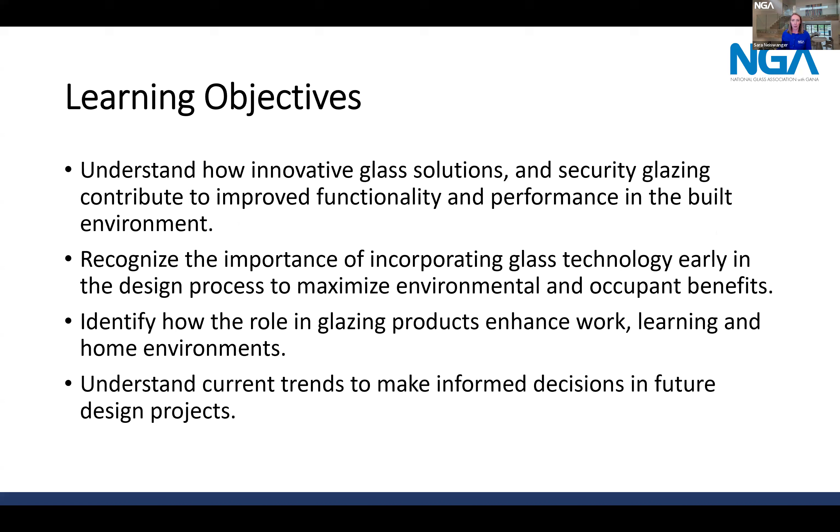So let's get a little background first on the National Glass Association and understand what this trade association does. We are the only association serving the entire glass and glazing industry supply chain, starting with the primary glass manufacturers through the fabricators, the glazing contractors and installers, and then finally suppliers, distributors, and other partners. We have over 1,800 member companies in these categories, and we also have an affiliate category for professions like architects, consultants, and educators. So we are hoping and intending to be your nonstop, one-stop shop for all things architectural glass related.

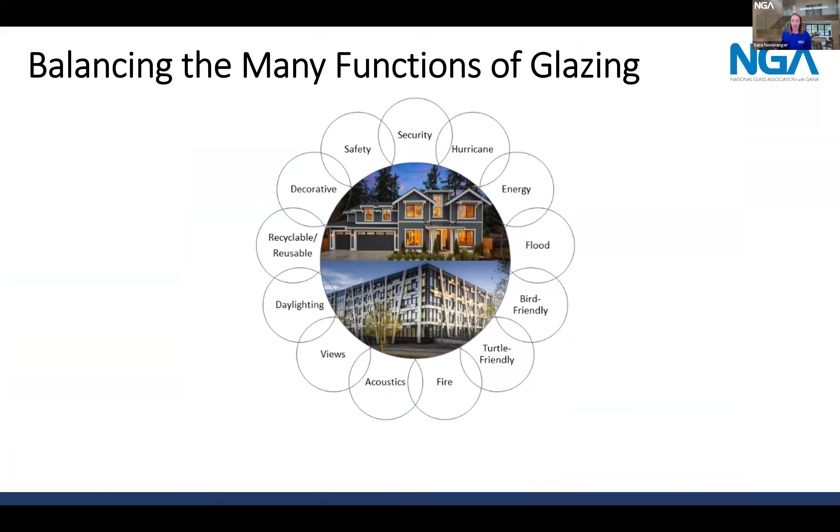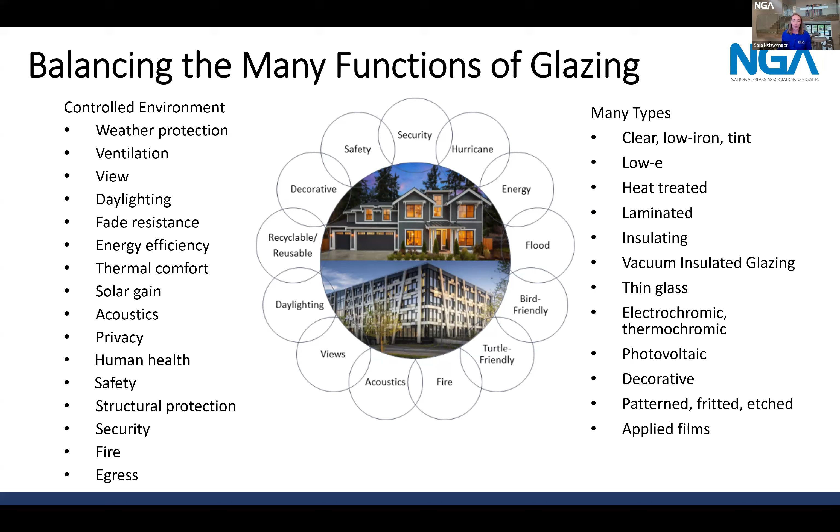So NGA advocates, promotes, and educates in all areas that influence glass and glazing. That means that in addition to promoting it, we're defending it and protecting glass when it comes to being selected as a building material.

If it impacts or influences glass, NGA is involved, and these are examples of some of the stakeholders we interact with on a regular basis: building codes, both at the hearings and by jurisdictions, standard setting, regulatory and certifying bodies, and other organizations in our building materials space. We coordinate often with groups like the Aluminum Extruders Council, the International Window Film Association, ANSI, and more. And then we do this coordination globally too.

Our teams are heavily involved in the international standards setting organizations. We've been to Glass Performance Days. We are also an AIA registered provider, and we engage with AIA often, and most recently NOMA as well. You can find us at ASTM, the National Fenestration Rating Council, and more. So we are trying to be involved to educate on glass and its use as broadly as possible.

Thanks, Sarah. So I'll be off camera, just cognizant of any bandwidth hiccups as we dig into some of these trends. That Venn diagram that Sarah showed, looking at all that glass can do, we'll return to that throughout this presentation while discussing 5 key North American market drivers and trends, the glass products coming out to meet those trends, and also how the glass industry is thinking about them in general.

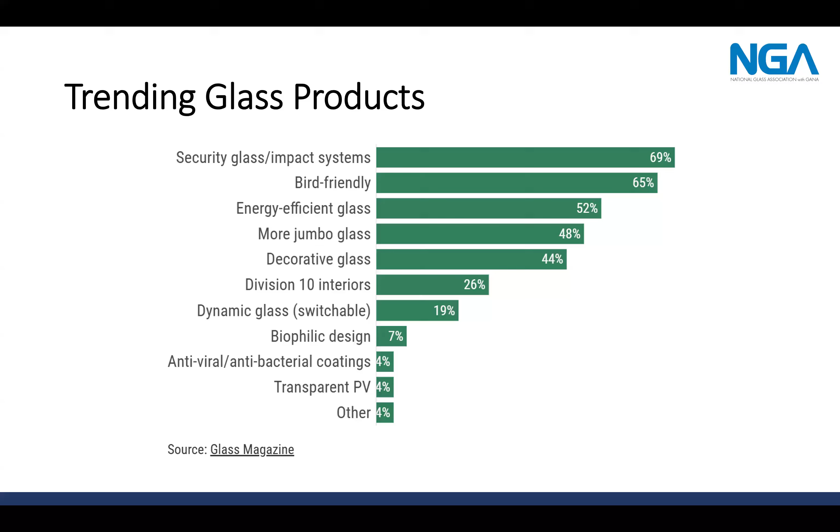Let's move on to our first trend, bringing back this Venn diagram. So protective glazing, where we're looking at it today, we pinpointed a few areas around this circle.

Within the notes of this presentation, we have put links to a number of NGA technical resources on each of these topics. Sarah may be posting this in the chat if we're able to. It's this section in particular. We have a huge wealth of technical resources on everything from blast-resistant glazing, detention facility glazing, school security glazing, plus some more general hurricane glazing and laminated glazing reference manuals. So if you want to really dig into the technical nature of what glass can do in all of these areas, please take a look at these resources. Many of them are free, you just have to log into the site.

Architectural glass is beautiful, versatile, and multifunctional, and it saves lives. Glass in this protective glazing category provides safe egress for occupants in the event of fire. It protects people and interiors in the face of hurricanes. It can keep intruders out, provide ballistic and blast protection, and it also keeps occupants safe in much more simple day-to-day ways. Glass floors have an anti-slip surface, and our railings and balustrades are all designed to make sure people are safe.

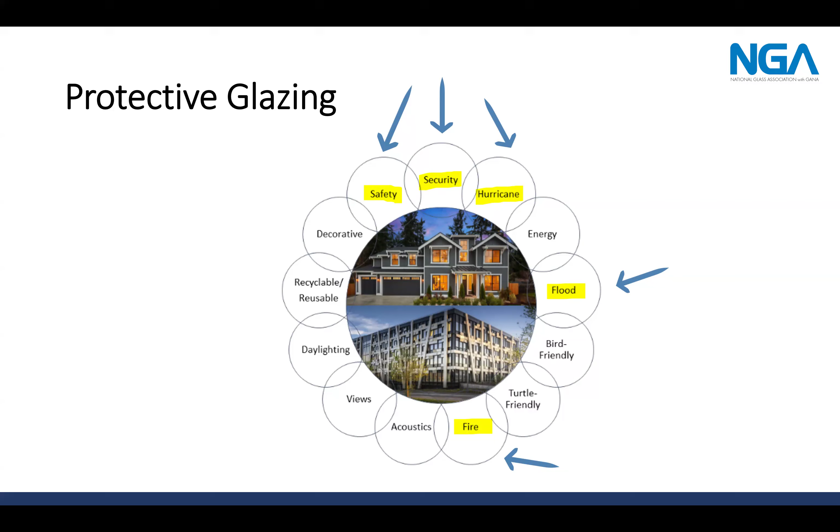For today, we'll just focus on 3 categories within protective glazing. The first is hurricane impact. On the next slide, we'll start to dig into this category.

I'm sure you are all very fluent in the hurricane codes, but just a brief history to remind us of how this became such a trend for the glass and glazing community. It really all comes out of Hurricane Andrew that hit Florida in '92, causing an estimated 25 billion dollars in damages. Just 2 years later, we started to see some hurricane mitigation provisions in the codes. Florida Building Code, first edition, came out in 2002. The most recent version was released in 2023.

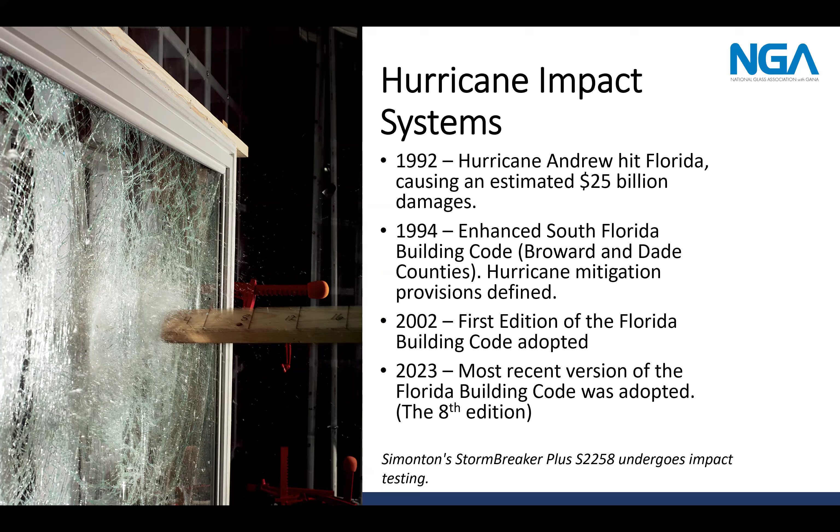Next slide. So what does this actually look like, though, in practice? Because we've had these hurricane codes for many years now, decades now, and the glass and glazing industry has responded by looking to do more.

Obviously, all of these products need to meet these very stringent impact test standards and water resistant requirements within them, but we also want them to look beautiful. We don't want to be bound by these requirements. It's really an opportunity to do more with these products. So that's what we start to see in architecture, as the glass and glazing community has begun to push the envelope of what we can do with these products while meeting the hurricane impact requirements.

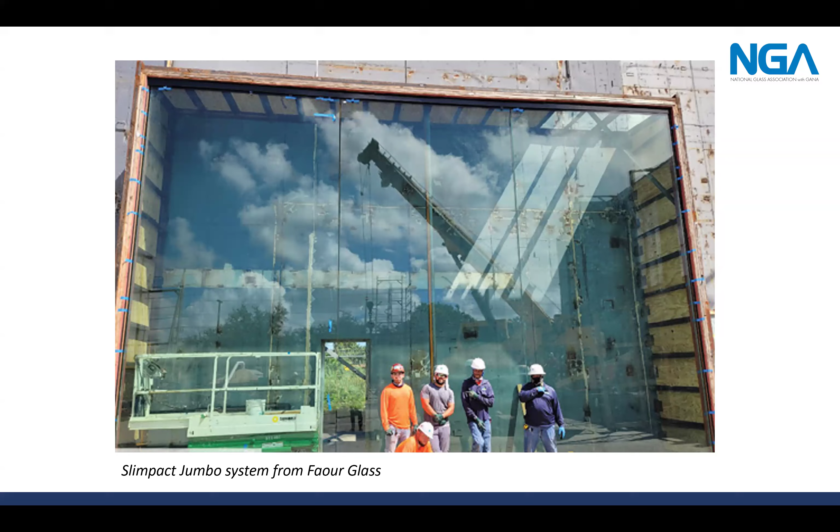Here is a related example. Flood barriers and flood zones are very relevant to hurricane-prone areas, but also to any low-lying flood areas near rivers and such. We're seeing, around the country, a need to consider flood barriers. What glass and glazing allows in these situations is to provide those views all throughout the year, and these systems are being tested to hold back the floodwaters when they come. For those who want to look at the test methods involved, it's pretty impressive, the hydrostatic load testing of these units, which are capable of holding back many feet of water in flood events.

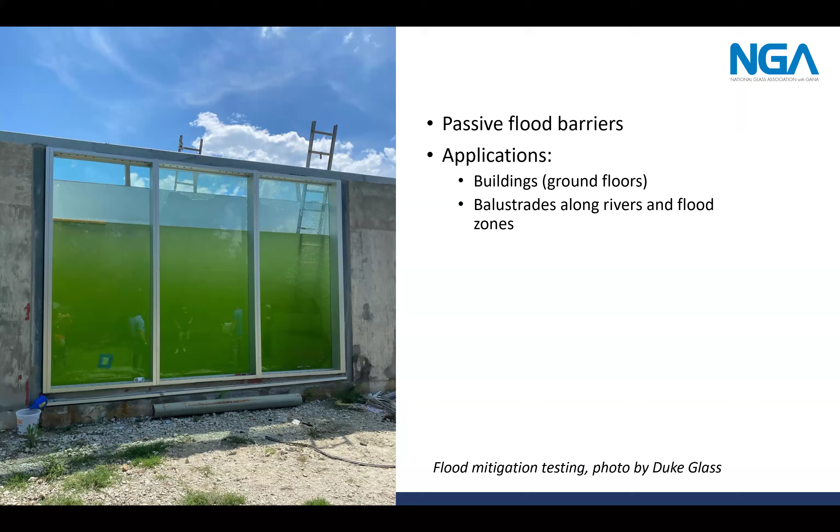Moving on to fire rated glazing, this is another example of protective glazing doing more on a project. Fire rated glazing is not new to building codes at all. I'm sure you're all very familiar with where you need these products in your hallways, along egress points in a facility.

But what we're seeing now with design trends is that folks really want that daylight to permeate further into the building. That means looking at spaces that may have previously been a solid wall with a small window, and wanting those to be all glass, or decorative glass. We're rethinking what we'd like these spaces to look like. How can we do more with them? Can they also be high performance? Do they also need to be security rated?

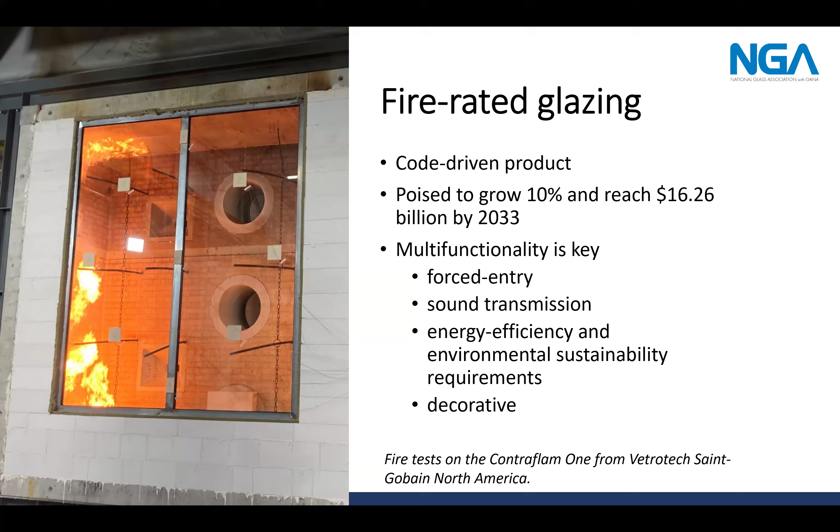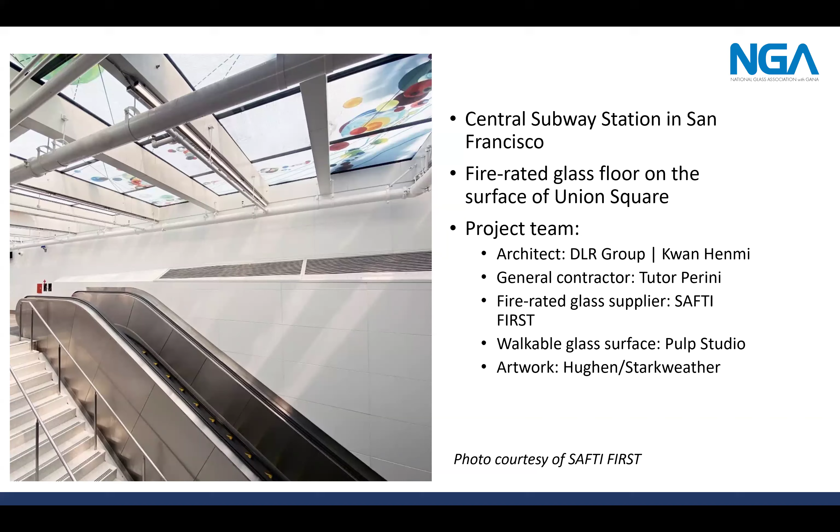Doing it with a decorative glass product adds even more to that, allowing for some aesthetic flexibility, bringing some beauty into it. One additional level of protective glazing: because it's a walking surface, it has to be a non-slip surface on the glass at top. So it's a fire-rated system that's also decorative and non-slip.

So we have heard that this has been an interesting area of growth for fire-rated glazing. Moving on to our final segment of this protective glazing is school security. So this has been one of NGA's key legislative priorities for several years, just with industry calls from the industry. We've come together in fly-ins in DC to support federal legislation and funding appropriation for school safety and security.

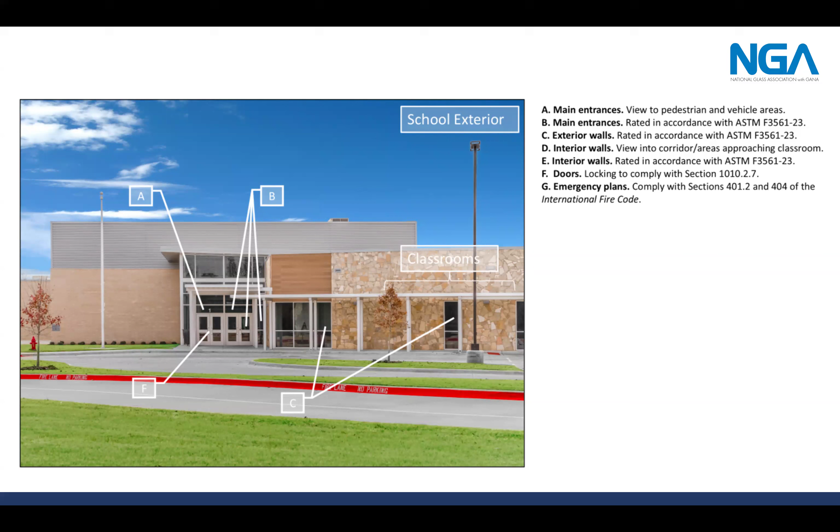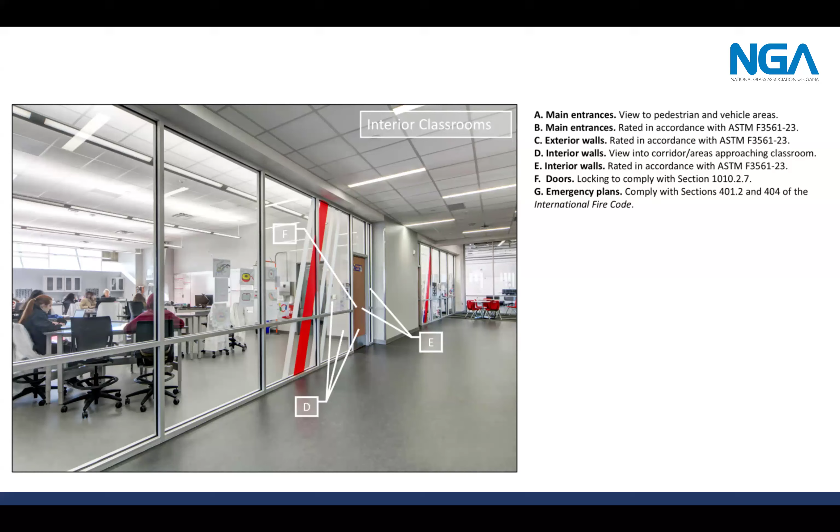And in the speaker notes here, we have really a wealth of resources about the test codes and what NGA and our members are doing to support some of these changes through fly-ins. And really, these are not bulletproof products. That's not what we're looking to do. We're looking to deter. In the average course of an active shooter situation, it takes about 3 minutes for responders to arrive. So how can we harden these exteriors enough to protect occupants with systems that readily exist? So with that, I'll close out the protective glazing section and let Sarah take over on our next theme.

Yes, thank you, Katie. So we're moving from protecting our occupants to now protecting habitats. In this section, we're specifically going to touch on bird and turtle-friendly glazing, both of particular importance across much of Florida as well. Bird-friendly glazing was the #2 trending product according to the Glass Magazine Top Glass Fabricators report Katie had on screen earlier. Its use has been primarily legislation-driven and supported by the ability to earn LEED credits, fulfill building sustainability desires, and its general versatility across project types.

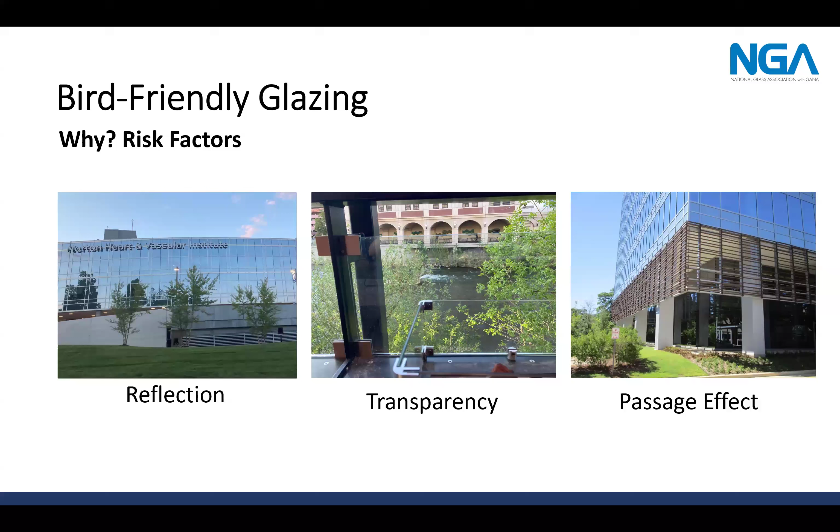And then the danger zones that we see in building, particularly with using glass. Plants, trees, bushes, and other types of vegetation, as well as water, can attract birds and lead to more collisions. Some studies using bird feeders demonstrated that collisions occur when birds take off from more than 3 feet away, after they've gained some momentum. And a majority of the documented collisions occur from the ground level up to about 100 feet. And this correlates with many of the natural habitat elements like a mature tree canopy that birds are already perched

in or flying from. The second picture, top middle, is an example of channeling. Channeling are landscape features that create a flight pathway along a corridor. So in this case, a sidewalk, for instance, is lined with trees and shrubs, but it creates a direct flight path channeling the birds toward the building. Glass corners, where glass lites meet at a 90-degree angle, very visibly create what looks like a fly-through condition when birds aren't able to perceive the barrier.

And then the lower photos, the levels adjacent to green roofs or rooftop gardens or terraces create a situation for birds. And then design features like alcoves or interior courtyards can actually end up being design traps for birds. It creates almost a mirror maze effect, and they have trouble finding their way out.

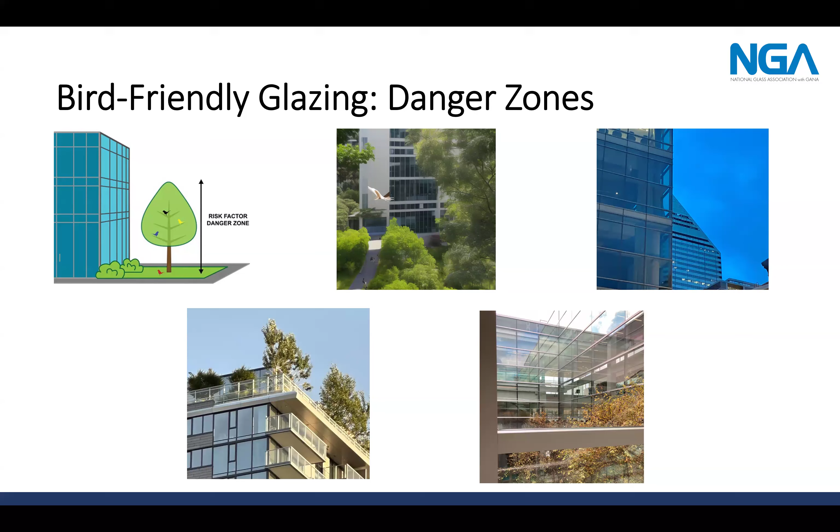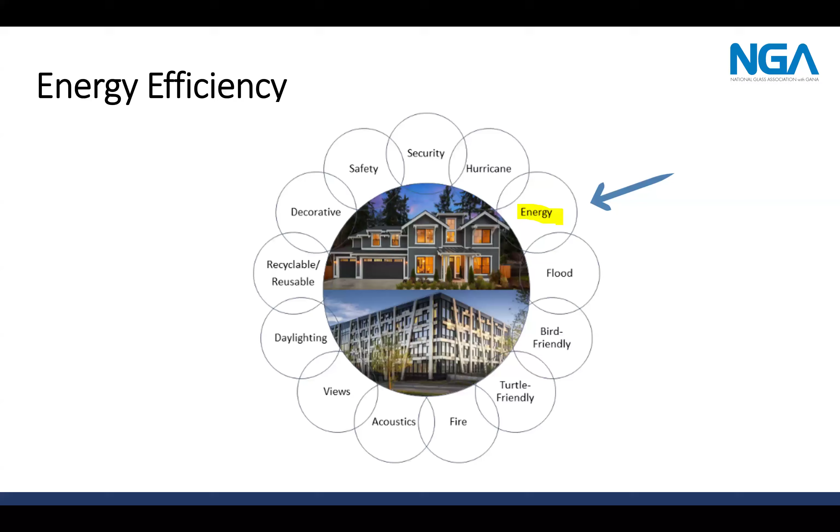We can go on to the next slide. The next couple of slides were provided by our energy code consultants who are really looking very closely at this on a day-to-day level. Our code consultant, Tom Culp, says that he's constantly receiving questions and inquiries about how the new administration might affect where energy codes are going.

And from his perspective, from what we've seen during Trump 1 and during previous administrations, from a high-level perspective, we expect to see that if the federal government steps out of pushing change in certain areas, often we start to see an increase in regional activity. So from an industry perspective, we're watching all of this.

What we have seen in the last several years are jurisdictions like New York City or the state of Massachusetts, California, these spaces that are introducing their own more locally based jurisdictional codes. And our industry is eyeing those as what we need to make sure that we can meet, and seeing how the rest of the country is following suit.

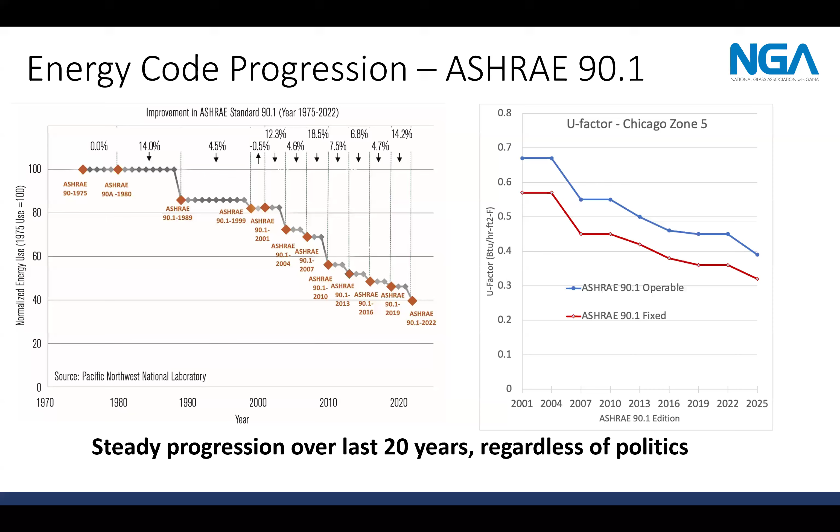On the next slide, this is another slide from Tom Culp, our energy code consultant. This is a historical look at what we've seen over the decades when it comes to our energy codes. And that's just an incremental increase in stringency. And this is what we expect to continue. This is sort of a slow-moving freighter moving these energy codes forward.

Next slide. And what is the glass industry's role in this? What is the built environment's role in this? These numbers, I'm sure, are familiar to everyone on the call, but according to Architecture 2030, buildings account for an estimated 40% of global carbon emissions. Building operations produce 27% of total emissions.

And moving to the next slide, we start to see glass's role in this. This data comes from Glass for Europe, the trade association for the glass industry in Europe. A few years ago, they put out a report looking at the impact of moving to high performance systems. So imagine if we could replace all existing windows with readily available high performance glazing, your standard, very familiar high performance systems, your insulating units with maybe a low-E coating.

If we replaced all windows by 2030, that would cut annual energy use by 29% and annual carbon emissions by 28%. If we could take that one step further and replace all of those windows with improved high performance glazing, by 2050, that would cut annual energy use and emissions both by 37%.

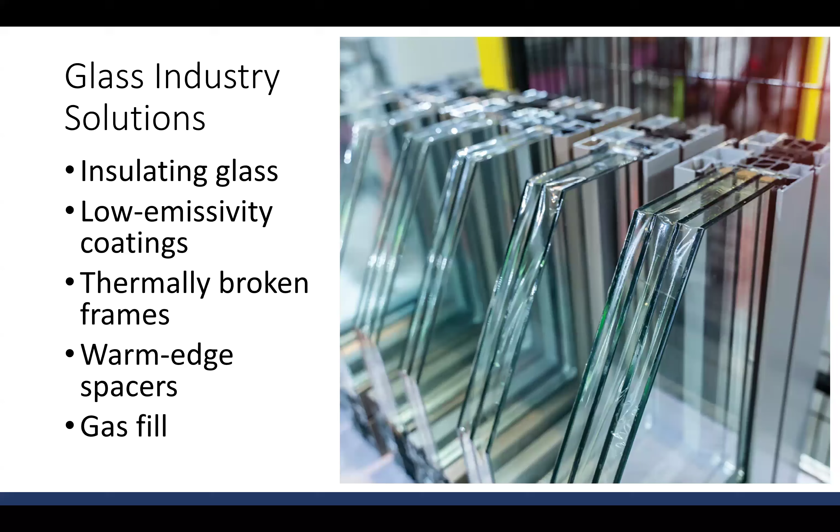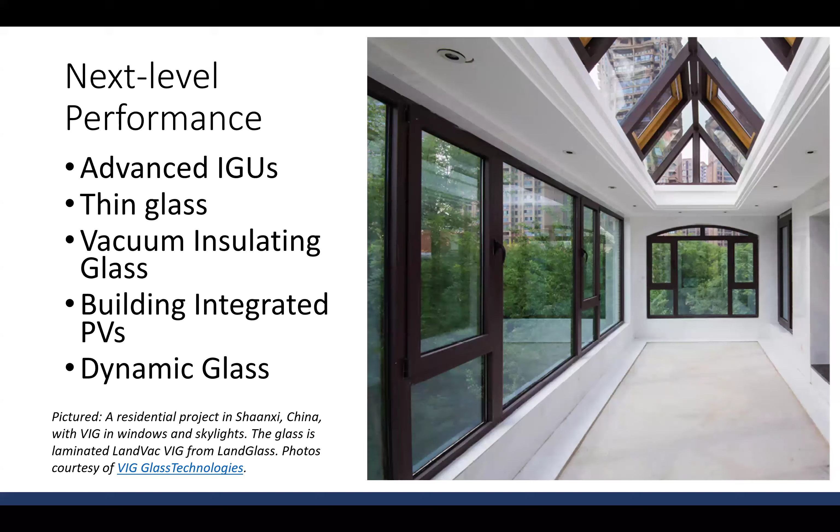That really brings us nicely to the next category, which is daylighting and views. As we're again looking at this massive Venn diagram of what glass can do, I think daylighting and views really goes hand in hand with a lot of the energy and sustainability considerations. But the way that the NGA looks at daylighting is obviously from a building performance perspective, but also from a human perspective.

We have a number of resources that will be in the chat about the benefits of daylighting and views. What we see in all studies that have come out in this arena is that occupants in spaces with access to natural daylighting and views have better health outcomes—better emotional and physical health outcomes. They're more productive in office environments. They see reduced absenteeism in education, and their test scores are improved. We don't have these stats up here, but there have been studies done about patients in hospitals—the healing rates are improved when patients have access to a window in their room.

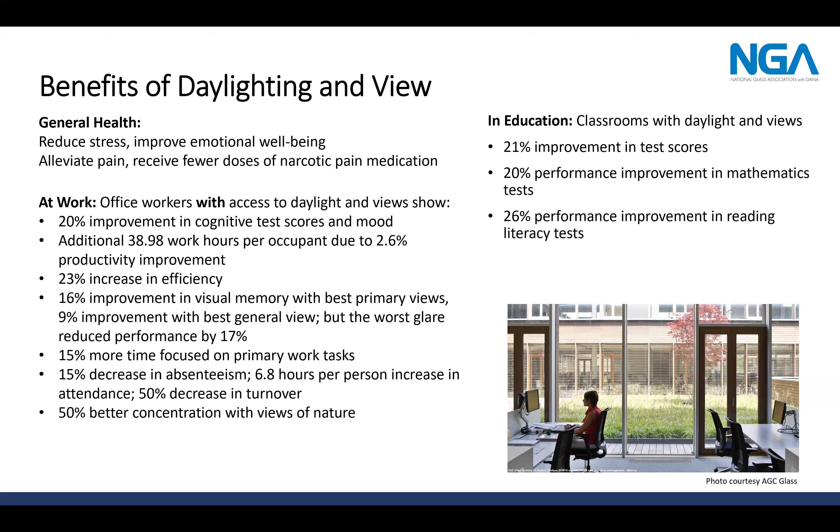The next slide just offers a couple of additional statistics about daylighting and views in classrooms. So from the NGA side, we're really thinking about daylighting and views as essential to occupant health and comfort. But as we move to the next slide, you see it has to be balanced with other considerations—daylighting and views are necessary.

However, we also need to account for glare control, because we won't have any of the benefits of daylighting and views if the sun comes in at such an angle in the afternoon that we're just closing our blinds and then forget to open them the next day. So then the blinds stay down and we're not getting any of the daylighting or view benefits. And also we're not getting any potential energy efficiency benefits because the lights stay on. So it's all a balance of maximizing daylighting and views while minimizing glare and discomfort to the occupant, and also managing solar heat gain, making sure that you're not sitting in front of a window and boiling at 4 p.m.

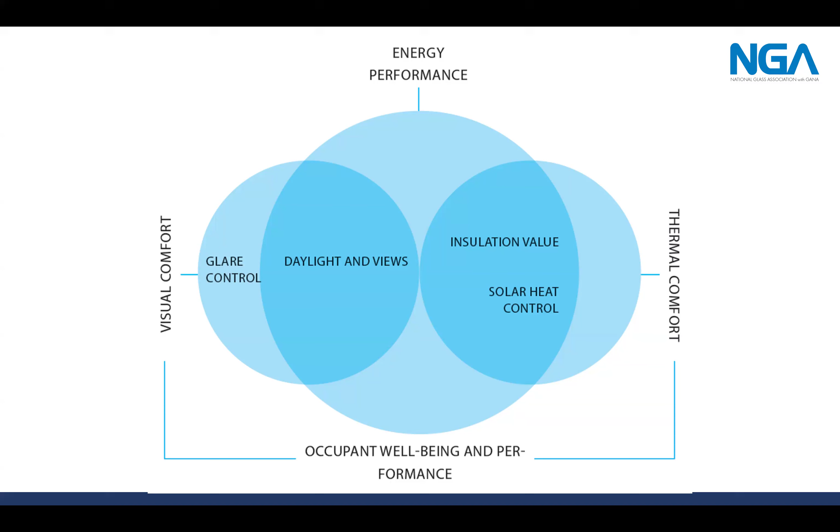Because the sun becomes so hot, all of this has to be done with a sense of whole building performance for energy, but also for daylighting and thermal comfort. On the next slide, we see some of the product solutions offering these balancing factors for daylighting.

Again, we're seeing a product like VIG being brought in for these purposes.

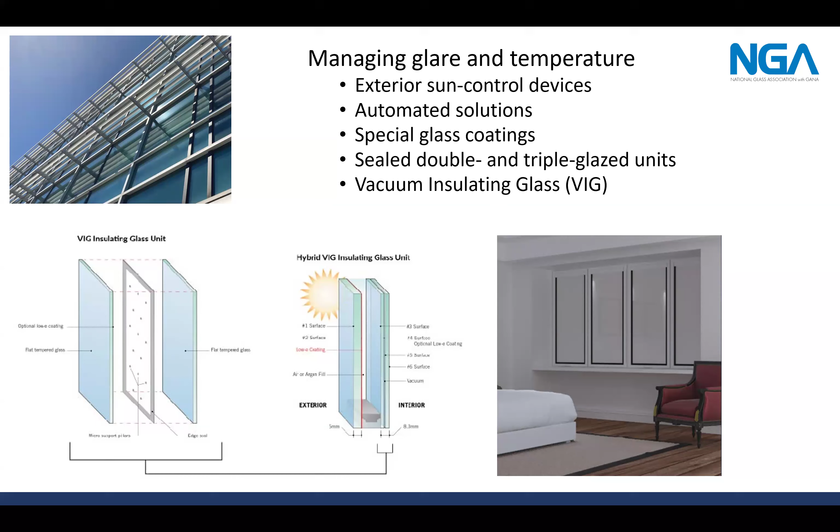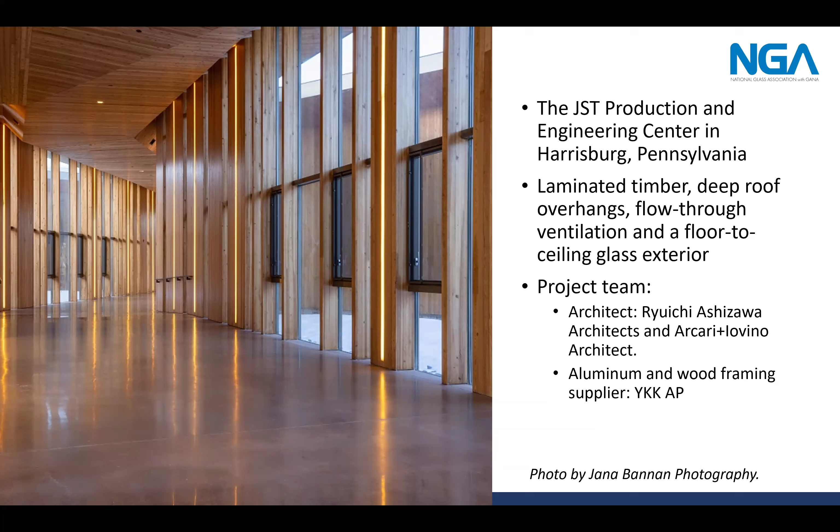Going forward, we have a couple of examples of buildings looking to execute this balance. Here we have a facility in Pennsylvania using things like overhangs to manage glare, but you also have floor to ceiling windows to maximize light. We're moving a step further here in terms of performance with the use of timber, high performance systems throughout, and ventilation as well.

The next slide shows another example of this at a bank in Oklahoma. Again you see the use of an overhang to take into account glare, visual comfort, and solar heat gain comfort, along with a high performance curtain wall and glazing system, as well as mass timber.

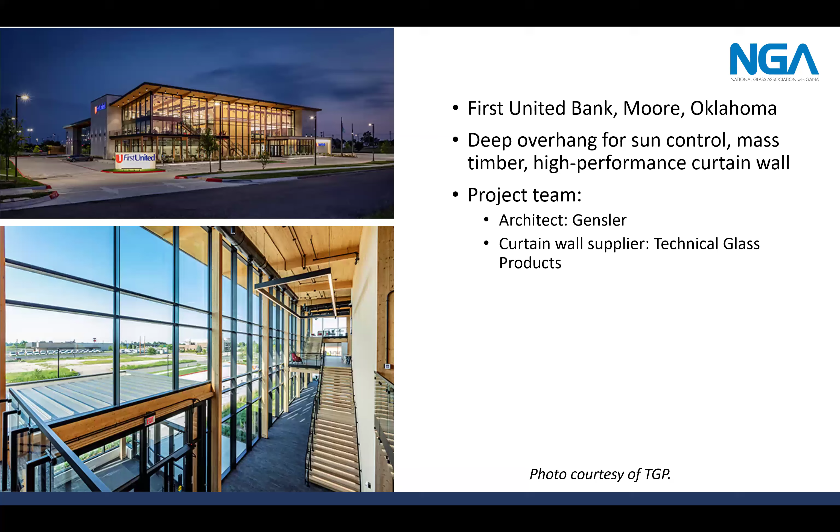And then moving forward, I'll hand it back to Sarah to dig into our final category, which is sustainability.

Yes, thank you Katie. This section is a nice wrap up from where we came through all of this, remembering and appreciating that we're trying to be good stewards of our environment, in particular our built environment and the products we're choosing. And that's the awesome thing about glass, is that it is infinitely recyclable and highly reusable. So we also want to continue to foster that approach when designing with glass.

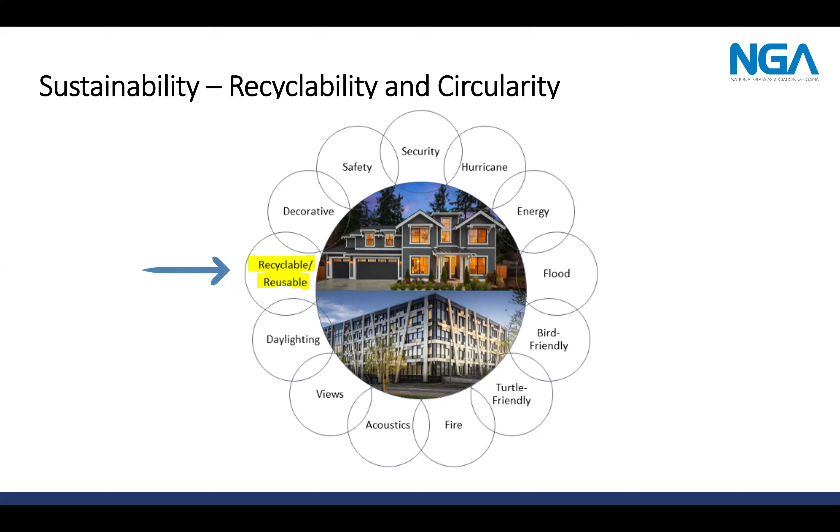Moving forward, I highly encourage you to review the resources coming into the chat. In particular, the advocacy one-pager is an easy, short synopsis of the issue and the strategy, and it's a great method to create the case with our stakeholders.

So in this slide and the following couple, we're just going to address a few of the actionable steps NGA has been taking with some of its interested partners.

This past academic year, NGA was able to work with Purdue University's School of Environmental and Ecological Engineering. Companies like Microsoft and GM were able to sponsor groups of seniors as a client, and NGA did the same, meeting weekly with their assigned students from August of 2024 until April of this year on a senior design project.

By the end of it, they had decided on architectural glass recycling as their point of study. The team identified off the bat that there wasn't enough data out there on architectural glass, and that they would need to create a resource to benefit those looking for exactly that. They identified two primary obstacles to glass recycling: transportation inefficiencies and material contamination.

In that case, that could be just other materials the glasses come in contact with during demolition. In some cases, we're still learning or working on how to recycle more complex makeups of glass as well.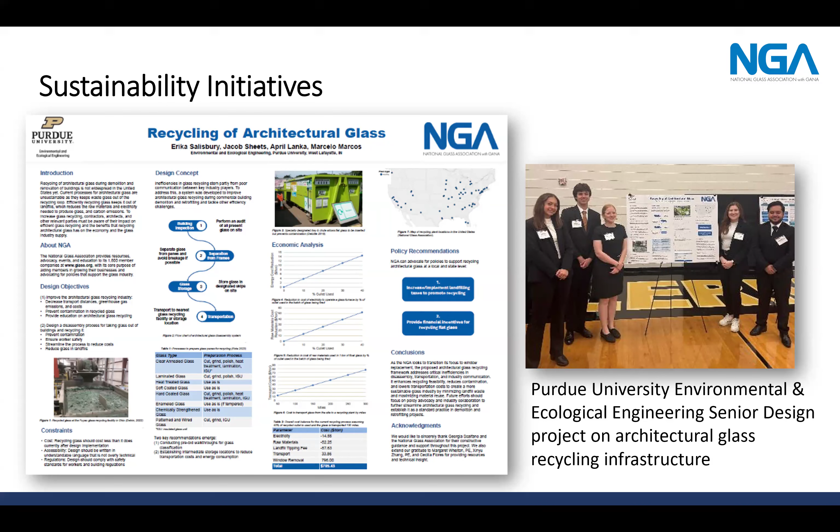They learned the benefits, challenges, and risks associated with glass recycling, and decided that since the technological and environmental case for glass recycling had already been made, they would aim to make an economic case. That is the point of their paper on the economical benefits of glass recycling.

We're also just in the frame of mind of reuse and recycling, making sure we extend that to the glass products we use in our everyday homes, whether those are jars of food or old glassware. All of it is worth and capable of being recycled.

These are just two or three examples of companies we have worked with in some fashion on a circularity project or with a circular economy focus. The first one is Infinite Recycled Technologies. They are an NGA member, one of several glass recyclers across the country. In this case, they had a case study written up on how laminated glass panels can be disassembled in order to be recycled.

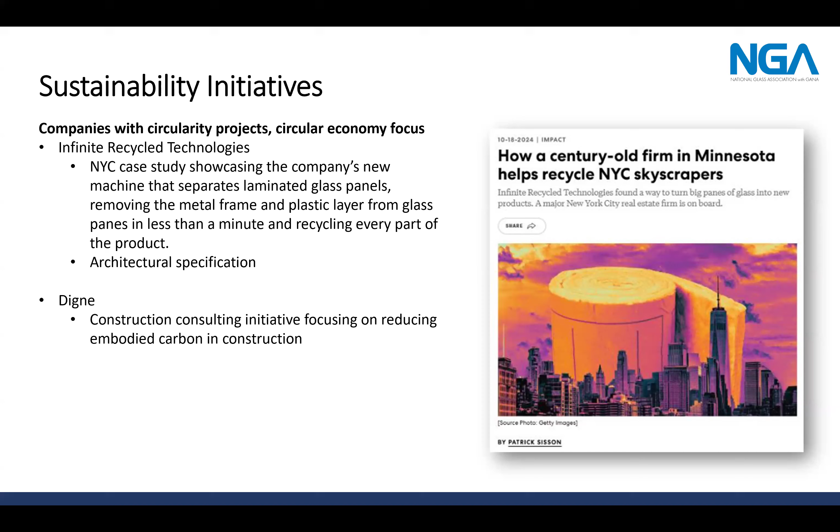In the chat, you should have the glass technical paper, Overcoming Challenges of Circularity in Architectural Glass Recycling. That is also supported by our World of Glass map. NGA's World of Glass map is not new, but what is new is the addition of glass recycling locations.

This is just a larger blown-up version, so you can see even around your areas the companies that elected to participate: float glass manufacturers, glass fabricators, and glass recycling facilities are all labeled. You can click on the icons and get some more detail on those particular companies.

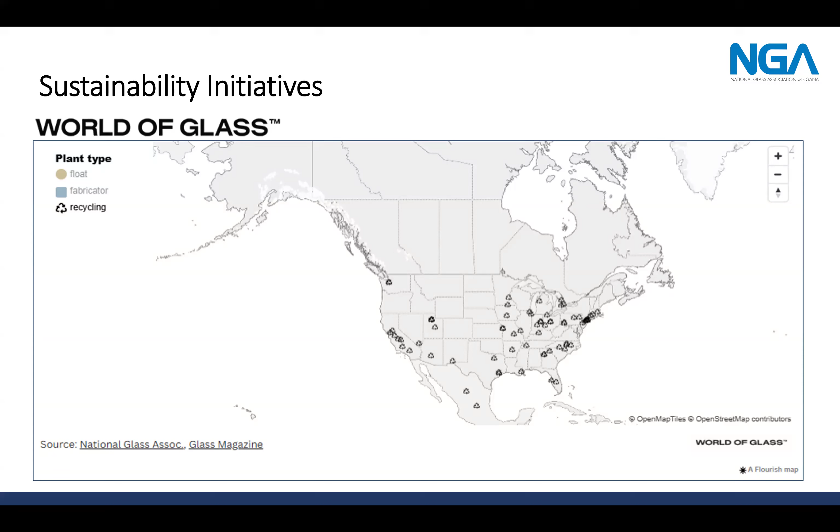That kind of wraps up the educational component of this presentation. We did want to take an opportunity to give you another chance to meet with us and learn more about glass. NGA is coming to Orlando in early November, and specifically on November 4th, we will be hosting what we're calling Blueprint for Collaboration.